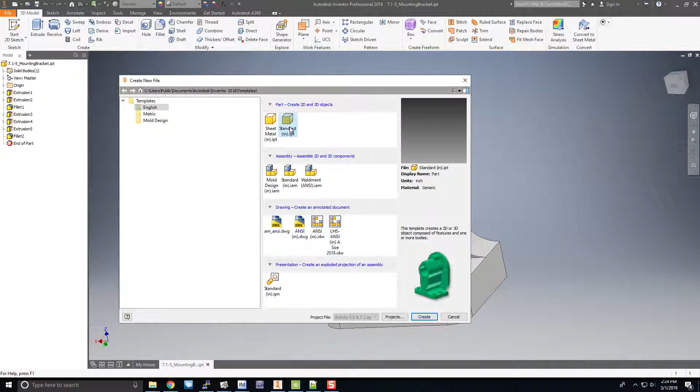All right, so this is a standard US inches template part. So we're going to pick the standard IPT. If you look at the part, I'm going to break this down sort of into the base and then the riser, the back part there. You can kind of visualize those as two prisms.

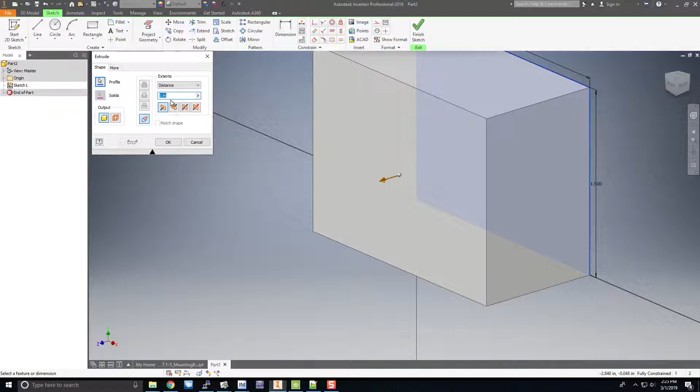So we're going to start with the base on the XY plane, and that's 2 inches by 1.5 inches. So I'll just put my dimensions right in there. We'll extrude that. It's a 1/2 inch thick, 0.5. And then I'd like to have that rotated. I could have picked a different plane, but we'll just set this view as our home view, and then that'll be the base that we'll put the holes in and fillets eventually.

Then to make that riser or the back mounting part, we're going to put a rectangle in here. Now this is where I always tell students, make sure you fully constrain your sketches. So this is a 1/2 inch from that edge, and it's a 1/2 inch from that edge, and it's a 1/2 inch deep, and that ought to do it for that. We're going to extrude that.

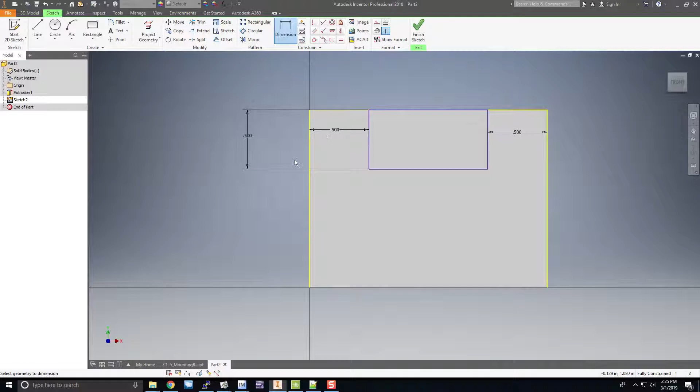That goes up. Now this is where it's a little tricky to visualize how high that goes. The overall height of the part is, I think, 2.75 inches, but this is going to go up to the center. If we go back to the finished part, this is going to go up just to the center, right? That line, that edge there. So I need the height of this extrusion to be essentially from the top of the base up to the center of this cylinder part here.

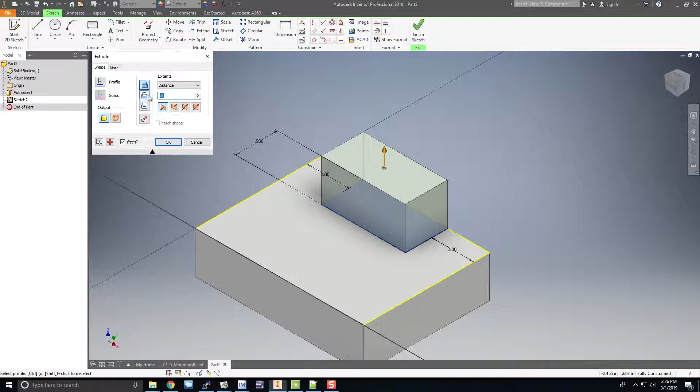I think that's 1.75. So let's go back there. 1.75. Take a look at that. That looks about right. We can always go back and adjust that if it's wrong. And then we've got our two principal, basic formations of the part.

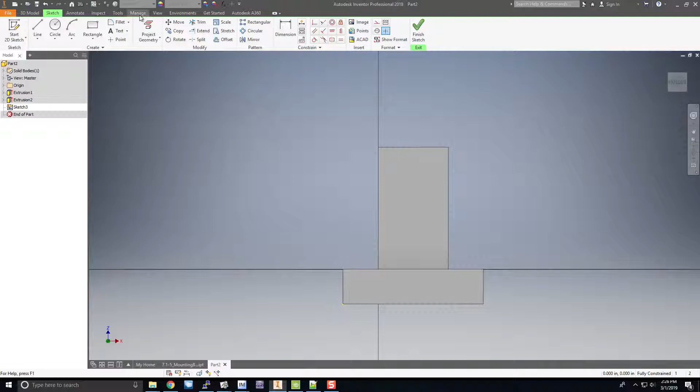To get that cylinder, I'm going to draw a circle, sketch a circle here. And this is pretty straightforward because I can get it to latch onto the midpoint of that line and then constrain it to the edge of that. And you notice that circle is already fully constrained.

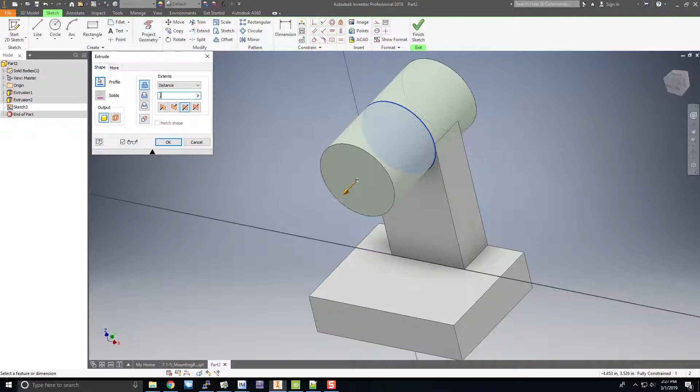So here I'm going to extrude that using the bidirectional or symmetric. So it's going to go in both directions, 1/2 inch in both directions from the, I guess that's the overall. So 1 inch, but split evenly in both directions from that plane. So a 1/2 inch forward and a 1/2 inch backwards from that plane. So we're going to finish that, and there you can see it's starting to come together.

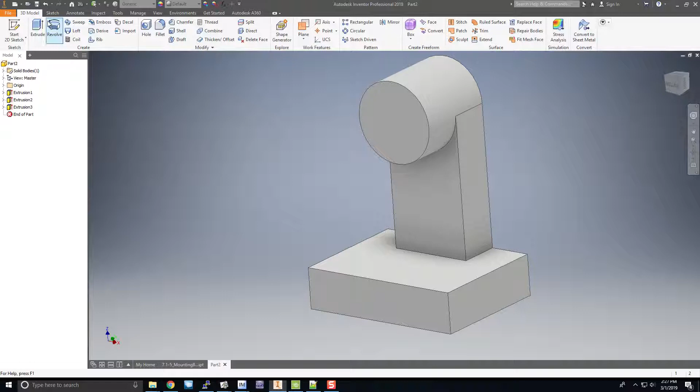All we need to do is add the 3 holes and then the fillets. So I typically do fillets last. I tend not to use the hole feature unless you need some special features like threads, like counterbore, countersink. Instead, it's much more straightforward just to do a circle and extrude. So here we can latch right onto the origin. The diameter of that is 1/2 inch.

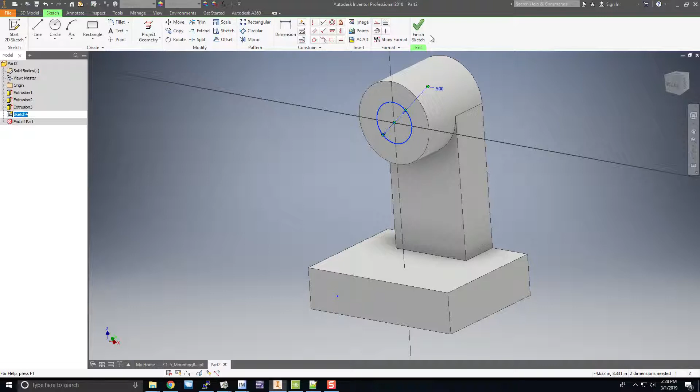We'll constrain that. And it's not constrained for some reason. Let's go back and check that. I wonder why. So this should be constrained to the center. It's not. That's very interesting. Well, normally that would be constrained right to the origin here. So what I need to do is fix that center point there because it's not constrained. Not sure why, but that happens sometimes. As long as it's in the right spot, you're good to go.

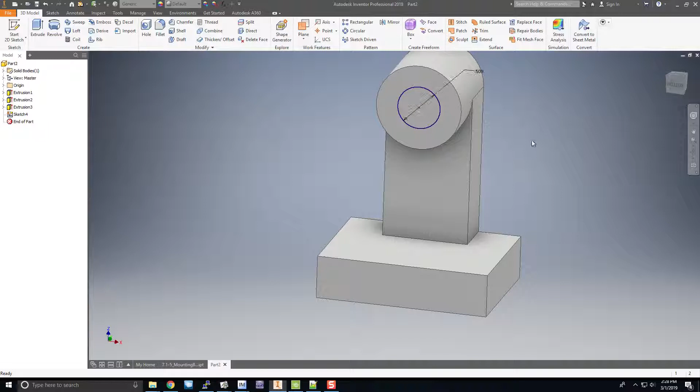We're going to extrude that. Now this one we want to just cut, so you choose the cut option, and instead of distance you always choose through all if it goes through the whole part, because if you choose a distance and then the thickness of the part changes, then your hole will be wrong. So there's that one. Then I got 2 last holes to make on this plane.

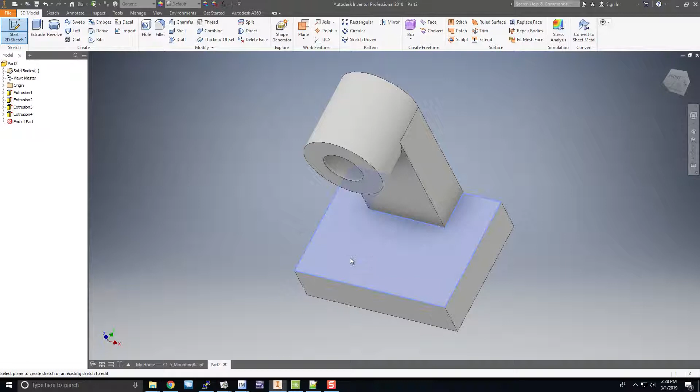It turns out if you look carefully, these holes are, the centers are coincident with that corner here. Okay, and they're also equal diameter, so I can use my equals constraint, and then all I need to do is dimension one of them. These are 0.5 inch diameter,

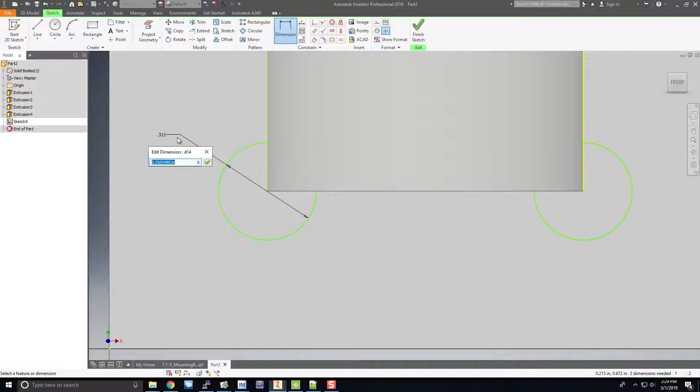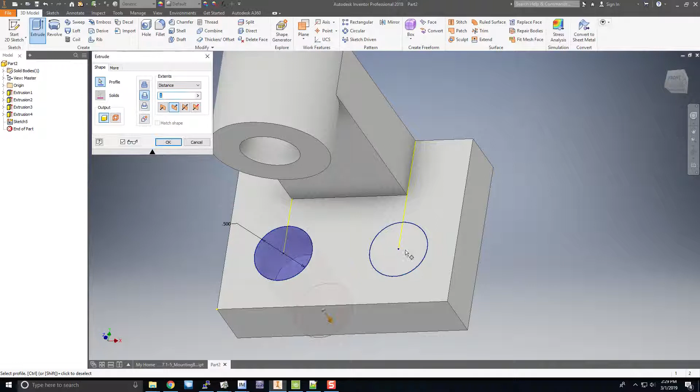and again, for some reason it's not constraining these, so I'm going to just use the fixed constraint, which is usually not a good idea because you never know if you put them in the wrong place and you use the fixed constraint, then your sketch and your modeling will be wrong. So we're going to use the cut option again to cut those out, and those are going to go through all. Click OK. So now all we need to do is finish our fillets.

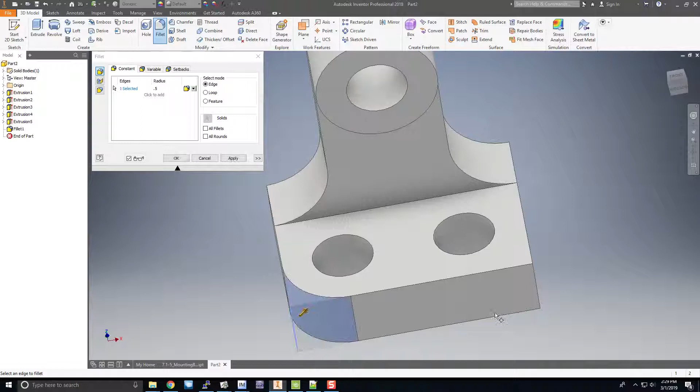We've got 2 fillets here and on the opposite side, which are the same, and those are a 1/2 inch radius, 0.5. So I can click both of those edges, fillet those edges with a 1/2 inch radius, apply that. Then I'm going to do 2 more fillets here and here, and those are a 1/4 inch radius, 0.25. Click apply, and that's pretty much it.